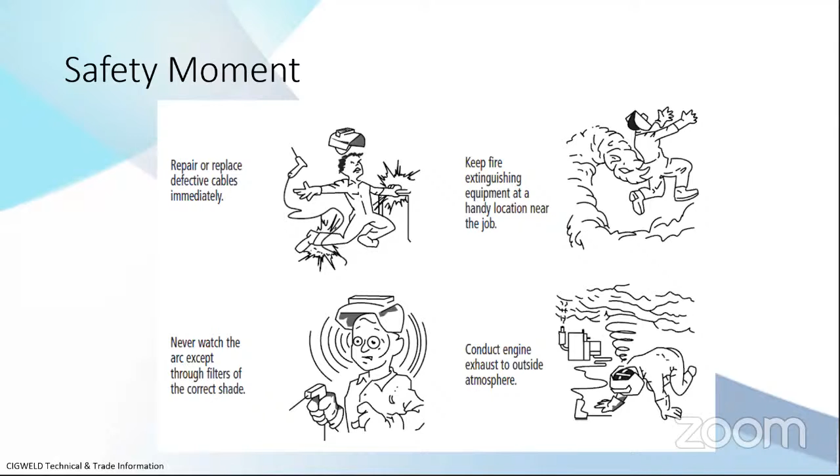Be aware of the ventilation from the fumes of the welding flux and welding gases. Also, if you're welding in a confined space, provide ventilation and have somebody to make sure that you are okay, and keep all the electrical connections safe. All the cables should be clear of the right of way of people, so they don't get stuck on the cable.

And when you are welding with explosive gas or anything that can be explosive, please take care of the distance, and also just beware of the environment during welding.

So after the safety moments, I will try to scope my presentation. I hope everything can be completed in the time allocated to me.

This presentation mainly relates to arc welding, and the materials are carbon steel, stainless steel, and nickel alloys. I will only speak about corrosion and some metallurgical defects during welding. Frankly speaking, I'm not a welding expert, so I will not discuss welding process, or any mechanical defects that may arise from welding. Also, other metals like aluminum, copper, and non-metallic materials like plastics or FRP, I will not discuss in this presentation. So the scope will be just arc welding, carbon steel, stainless steel, and nickel alloys, and corrosion problems in welding.

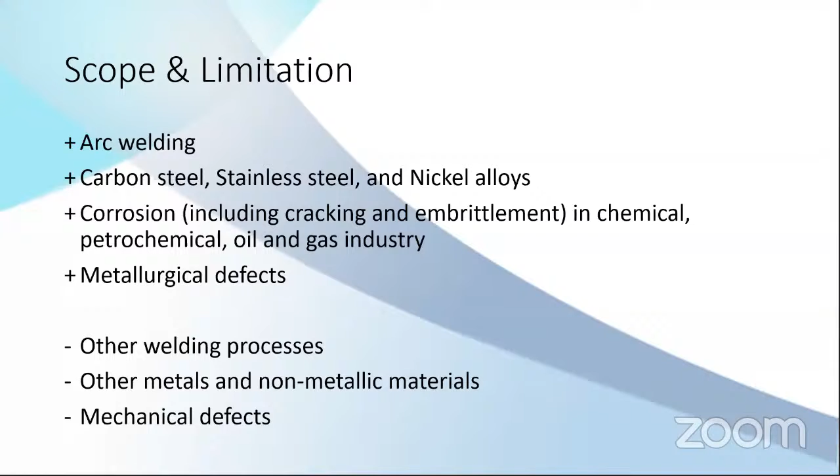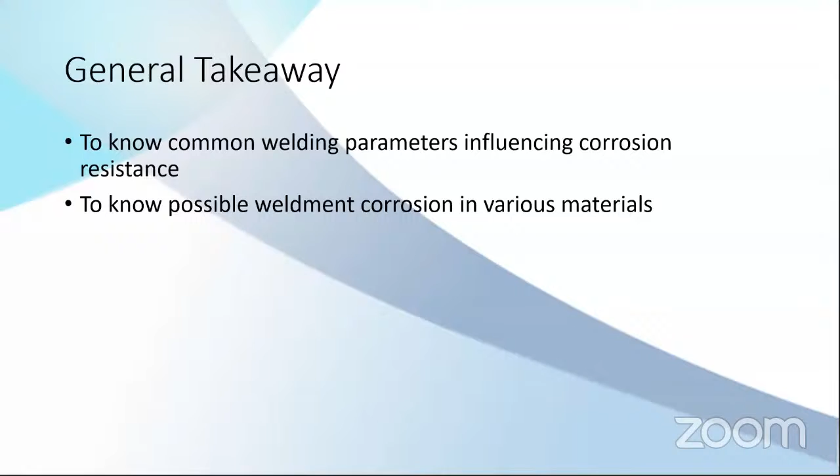This presentation is very basic. So if you are already an expert in welding, you might be bored by this, but this is for, like, a junior engineer, so they can take something from this presentation. First is for people to know the common welding parameters that can influence corrosion in materials. Also, what are the possible corrosion problems in the weldments of various materials, and to know the importance of corrosion qualification tests before welding. The last one is to know additional information that I hope can reduce the probability of weldment corrosion.

For this whole presentation, there will be a lot of abbreviations. I'm trying to shorten a lot of things just to make it more clean to the eyes. So if you find CS, it means carbon steel, SS means stainless steel, HAZ means heat affected zones, CRA means corrosion resistant alloys, which is a combination between stainless steel and nickel alloys, SCC means stress corrosion cracking, and PWHT is post-weld heat treatment.

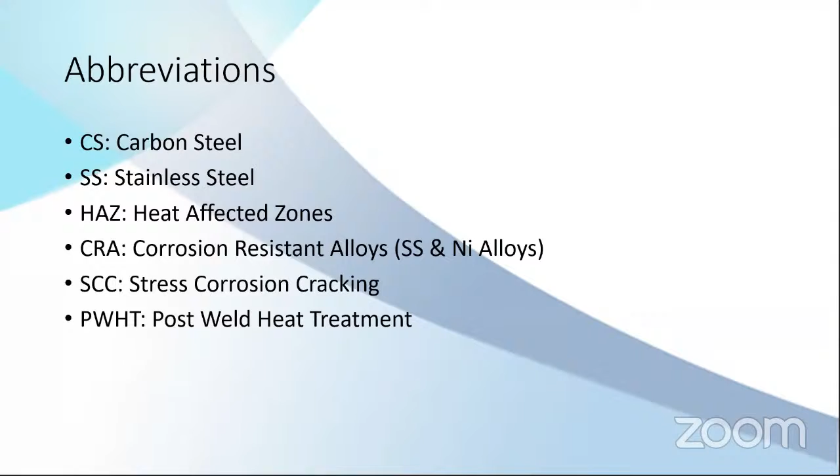Starting with corrosion, what is corrosion? This is my own words, so this is what I think about corrosion. It is reaction with environments causing the degradation of the materials and rendering it unusable over a certain period of time. So it might be fast, it might take some time, but it will degrade. And the problem is it cannot be seen after you weld the materials. It's not easily seen. You might see it after a few days or few months or few years, but it cannot be seen immediately.

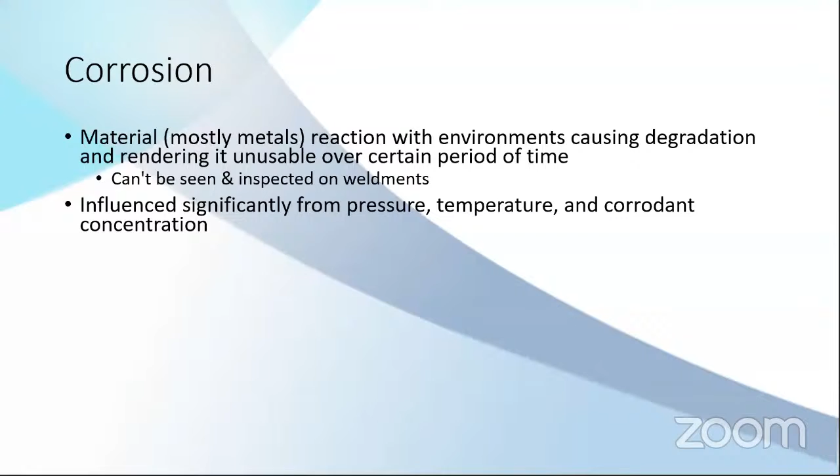Corrosion is something that is influenced significantly by the pressure, temperature, and the concentration of the corrosive substances.

Normally, the main mitigation, in general, there are 5 mitigations of corrosion. First is using proper material selection. Second is cathodic protection. Third is you coat the materials to avoid contact with the corrosive environment. Fourth is chemical treatment, where you change the environment. And the fifth is corrosion monitoring. You just monitor the corrosion, it's already happened, but you can monitor to avoid failure. So before failure, you already know that this is going to fail, and you can mitigate, change the materials, or repair the materials.

And the aim for the welding is to get not better corrosion resistance, but at least similar to the parent material.

This is what I think is why the weldments area is more susceptible than the parent material. In the parent material, for example, a pipe or a plate, it's produced in a factory environment. It's mass production, so the process of production is mechanized, automatic, and they make the material almost every day. They produce a pipe 1,000 tons probably every day, so it's a uniform process. The microstructure of the material can be easily controlled by heat treatment because the sizes are limited, so it's easily put in the furnace and heat treated to get properties according to what the customer wants. Chemical composition is uniform, it is already standardized, for example in ASTM, and there is no heat affected zones.

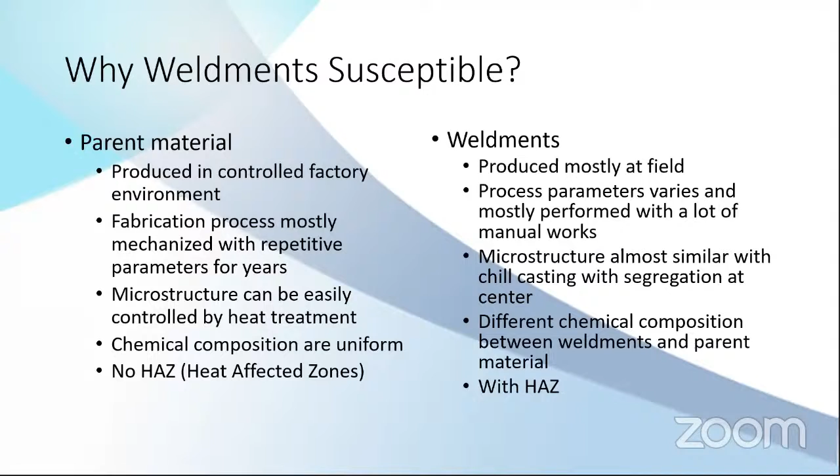Microstructure are not uniform, it's like a chill casting in combination with segregation of the chemical elements. And normally filler metals have different composition from the parent material, so you can get a very different chemical composition between the welding and the parent material. And the last one is in the welding, you have heat affected zones. I'll explain later about the heat affected zones.

What makes weld susceptible to corrosion is the segregation of the chemical elements, the probability of secondary phase precipitation, the possibility of heat affected zone, and the grains have recrystallization and probably grow, and also vaporized alloying elements. When the parent metals get heated, some part of the chemical elements get vaporized because of temperature that reaches thousands of Celsius.

Possible contamination of the weld pool from oil, grease, from oxygen. And when you weld, you put a very high temperature, and it can give you residual stress after the weld is cool. Also, rapid cooling may happen during welding, especially during arc strikes or in the area of unmixed zones.

And surface finish - after weld, you need to clean the surface again to avoid reduction of corrosion resistance. So you can find heat tint after the weld. You can have slag, and you can pickle the surface to get better corrosion resistance.

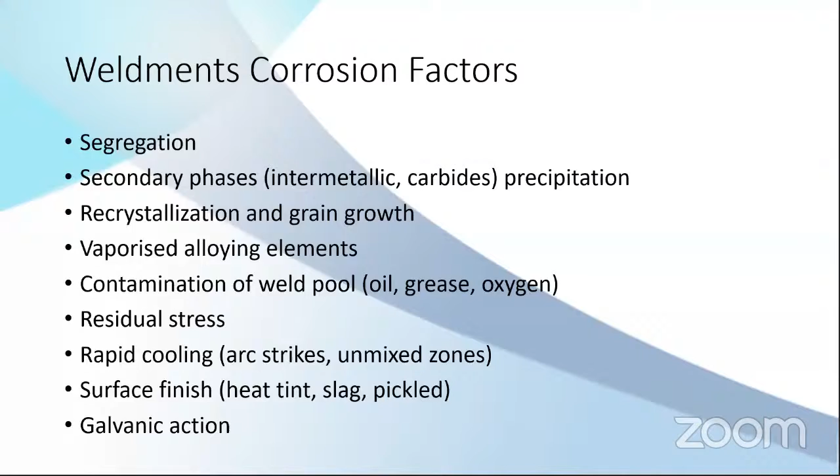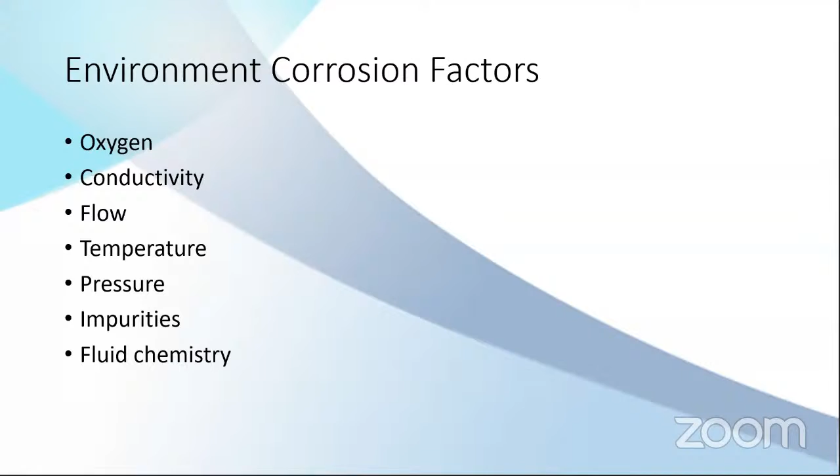The previous slide is from the welding, but this slide is from the environment that can cause the corrosion. If the fluid has oxygen, definitely you can get corrosion. If the fluid is highly conductive, also it makes it easier to get corrosion. High flow, high temperature, high pressure, presence of impurities, the total fluid chemistry - all this is variables that can affect the corrosion risk.

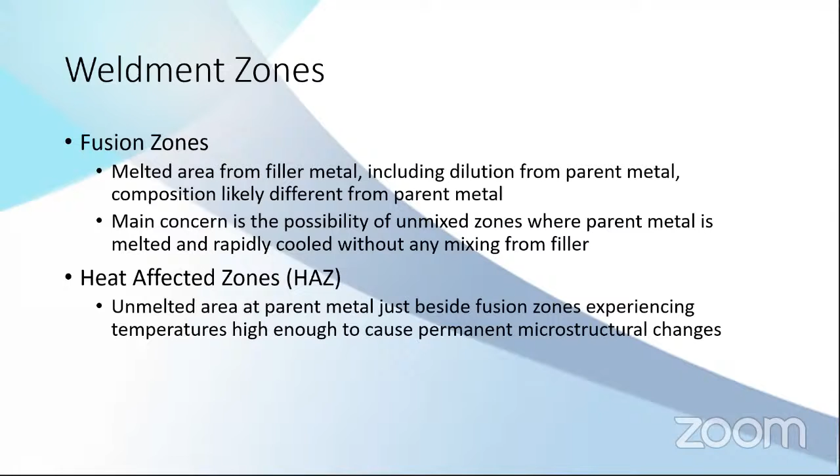It's like autogenous welding. And the second zone is heat affected zones. It is an area of the parent metal that is not melted, but it experiences high temperature, so the microstructure changes permanently.

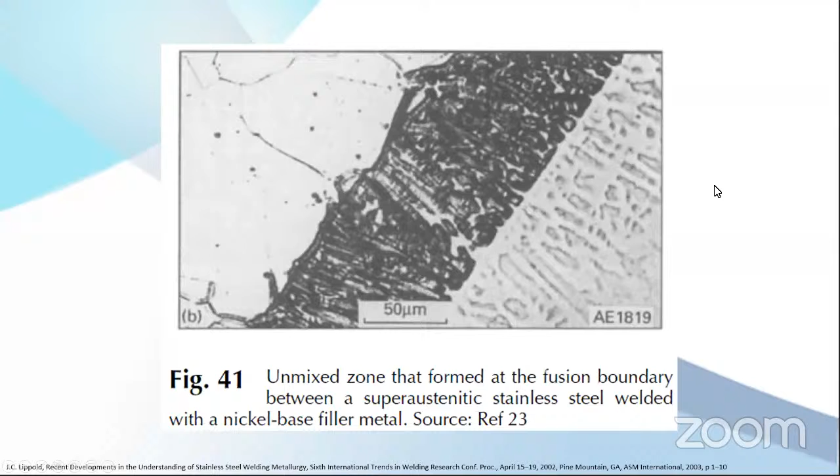And what are the common corrosion types that happen on the weldment area? I have compiled some of the corrosion types that I know. This may not be everything, but this is what I know mostly, and this is what I normally mitigate when I write the specification for corrosion prevention.

So there will be preferential weld corrosion, sensitization, knife line attack, secondary phase precipitation, liquid metal embrittlement. This is all I can consider metal loss corrosion, where the metal will be losing material over time. So this is predictable and it can be monitored.

The second one is SCC, or stress corrosion cracking. This is the worst of all, because normally it cannot be predicted when it will happen, because it's a crack. When the crack happens, then it's very easy to lose the pressure containing strength when you find cracks. And these cracks can be caused by many factors.

It can be from chloride, polythionic acid, sulfide, caustic, amine, and carbonate. All of this chemistry normally we can find in oil and gas, chemical, and petrochemical. So there might be other corrosive environments that I didn't mention here because it's not my specialty.

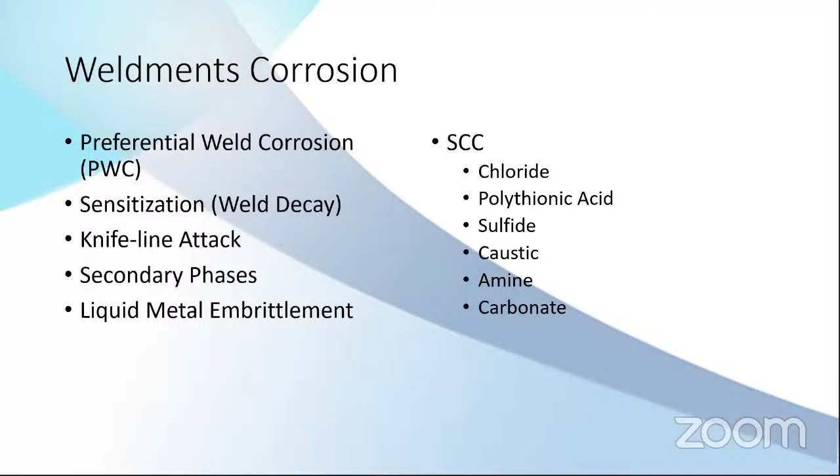So I will discuss one by one of these weldment corrosion types. First is PWC, preferential weld corrosion. Affected materials are carbon steel. The corrodant is the corrosive elements that can cause the corrosion: acidic water or low pH water, seawater, high CO2. So it's like a carbonic acid.

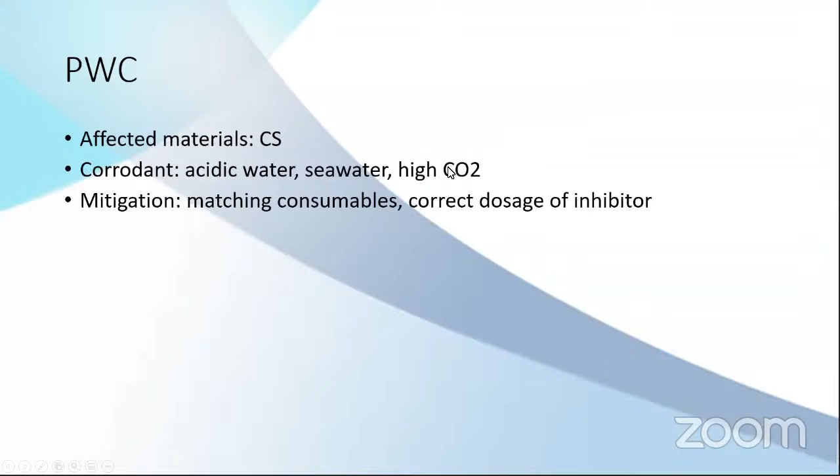This preferential weld corrosion is where the weldments are corroded faster than the parent material. To mitigate it, use matching consumables and correct dosage of inhibitor. The reason is that weldments have different chemical composition and microstructure than the parent metal. So when consumables used are not similar, not close to the parent material, it can be preferentially attacked.

It might have a lower corrosion resistance than the parent material, so it gets attacked even more because of the galvanic action.

And why is the mitigation correct dosage of inhibitor? Because this also happens when you have a system where corrosion inhibitor is used. Normally, when we use the corrosion inhibitor, we qualify how much inhibitor we need to add to the system to make it long lasting, make the corrosion rate low. But this qualification normally we do with the parent material or corrosion monitoring like a coupon or corrosion probe, and we didn't do it from the weldments.

And the problem is that the weldments are not fully protected by the corrosion inhibitor, so they can get preferential weld corrosion as well. So when you use corrosion inhibitor, normally the best practice is to increase the dosage a little bit to make sure that the weldments are protected.

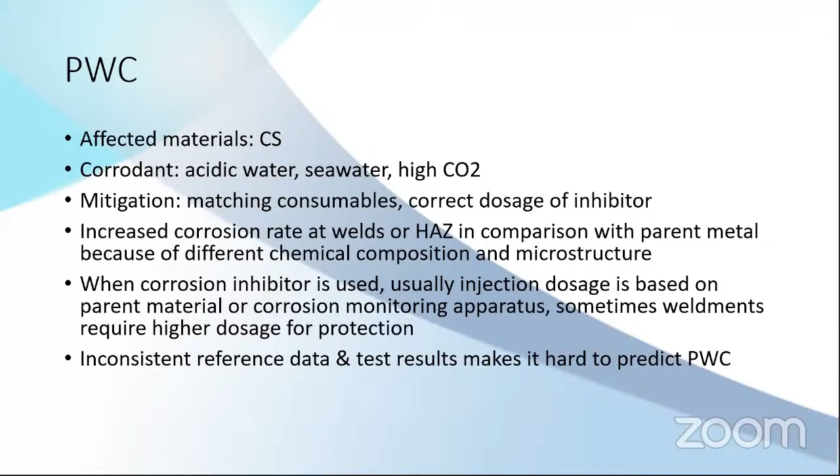So it's hard to predict if the PWC will happen or not. The best option is to use matching consumables always to mitigate this problem, so you don't have any chances of this PWC.

And this PWC happens mostly in very corrosive environments. If it's mildly corrosive, it normally doesn't happen, so you get the same corrosion resistance between the parent material and the weldments. But if it's in a very corrosive environment, then you can have it different. The weldments probably get attacked faster than the parent material.

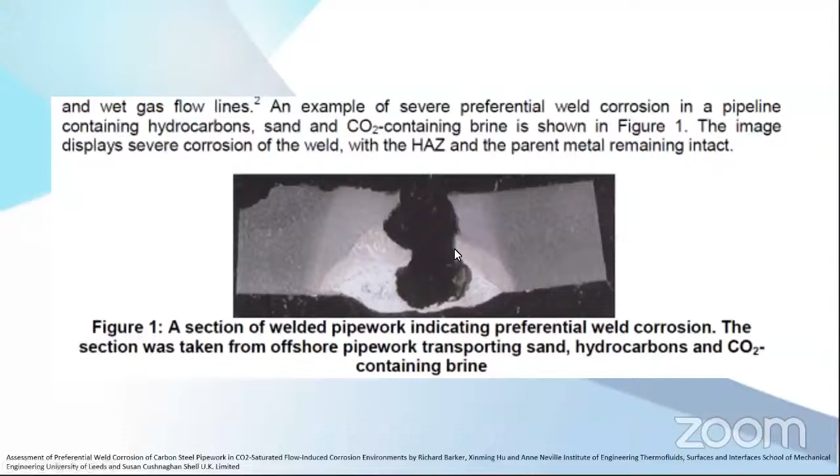And this is the testing that was done by TWI. They're testing what the effect is of using consumables with different chemical composition. You can see the weld is the black one, and the rest is white, which is the parent material, and beside this is the heat affected zone.

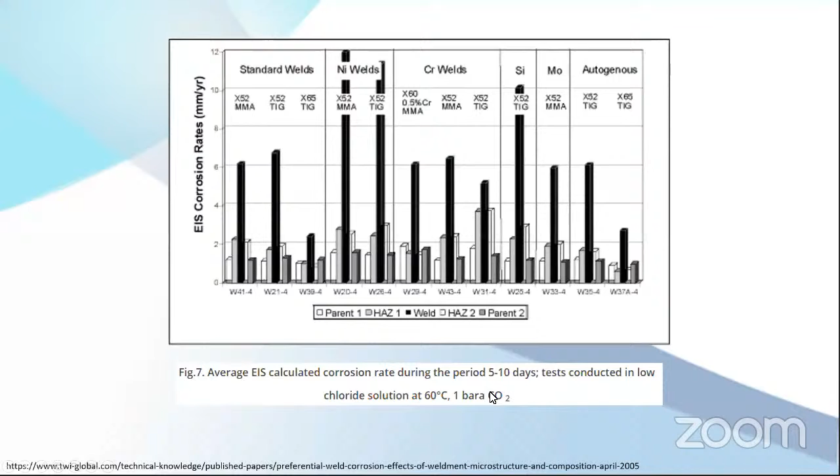As you can see, the result is inconsistent. Sometimes, even in the matching consumables, you can have higher corrosion in the welds, and sometimes you don't. In the nickel addition welds, 1% nickel, you get very high weldment corrosion. With silicon, you also have very high corrosion. But this is in a low chloride solution, 60 degrees and 1 bar CO2.

So previously it was PW corrosion for carbon steel. Now it's a sensitization problem. This is for stainless steel and nickel-based alloys. When the stainless steel or nickel-based alloy are sensitized, any corrosion can start on the material.

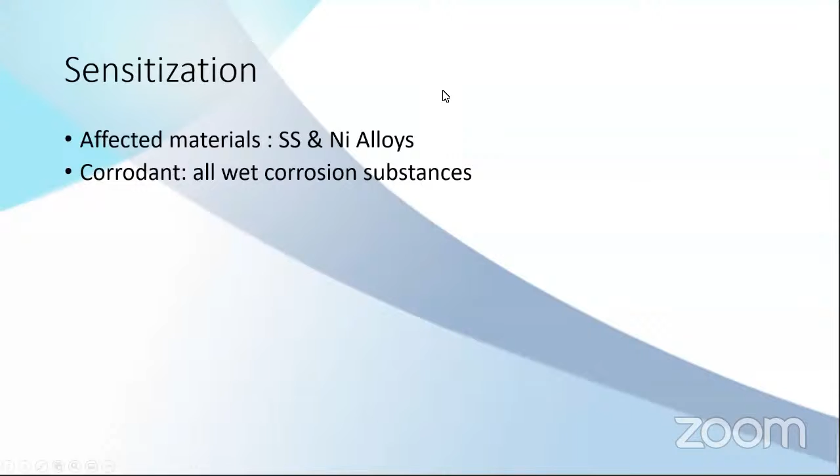So this sensitization is the reaction between carbon and chromium in the stainless steel or nickel-based alloys. One of the mitigation methods is to use lower carbon, or to add stabilization chemical elements, either niobium or titanium. These take carbon more easily than chromium, so when you add them, they react first with the carbon, and the chromium can stand by itself. It doesn't react with the carbon.

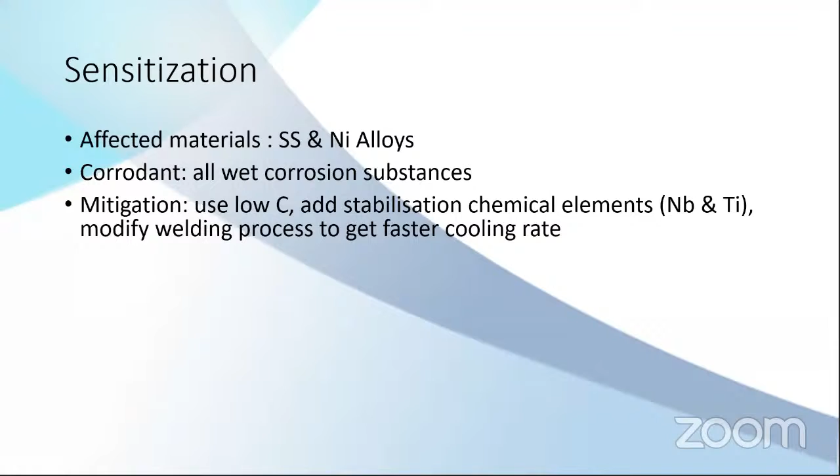Or if you don't have that choice, you have to modify the welding process to get a faster cooling rate, so there isn't enough time for chromium and carbon to react. This is the mechanism: the precipitation of chromium with carbon creates chromium carbides in the heat affected zone grain boundaries, and this happens at temperatures between 500 to 900 in general. It normally occurs during the cooling of the welding process.

What is the chemical composition? It's chromium 23 and carbon 6, meaning 6 carbon atoms take a lot of chromium atoms - it's 1 carbon to 4. So even a small amount of carbon in the material can take a lot of chromium from the metal. When the grain boundaries don't have enough chromium, you can have corrosion in that area.

For information, even if you use low carbon steel and addition of chemical elements, it doesn't make it immune, but it prolongs the precipitation time. So if you have equipment working at 500 or 600 Celsius for years - I'd say 5 to 10 years or more - then you may have this problem.

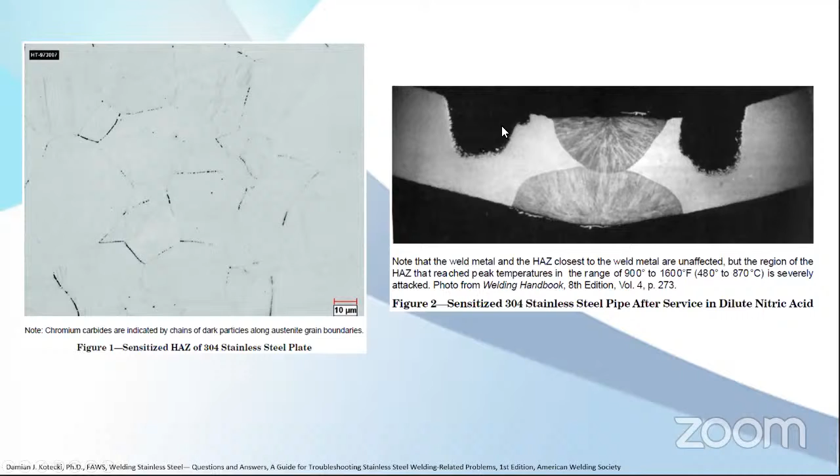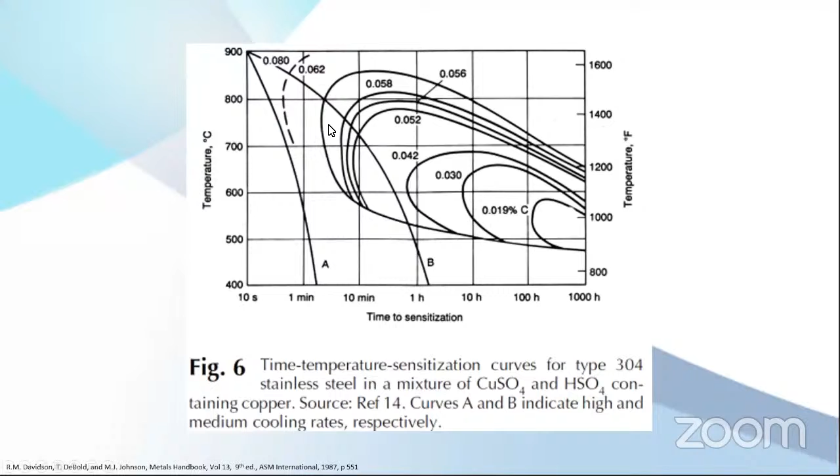So 0.03 is the L grade, for example 304L or 316L follows this line. I'd say it's pretty safe for any welding cooling not to reach this line. And it's not only stainless steel - nickel alloys too. Although it's very rare, nickel-based alloys can also have this sensitization. It's not the same curve, but the same concept: when you cool the metal and it contacts the nose, you get sensitization. So try to avoid long cooling times so it doesn't contact the nose.

Just as an example of the difference between stainless steels: for 304 you have maximum carbon 0.07, but for L grades you have maximum 0.03. Then there are stainless steels with stabilization elements - 321 has titanium, 347 has niobium. These can have higher carbon, 0.08, but the carbon is taken by the titanium or niobium. So there's no problem with chromium carbides - all the carbon is already reacted with titanium or niobium, so there's not enough carbon left to react with the chromium.

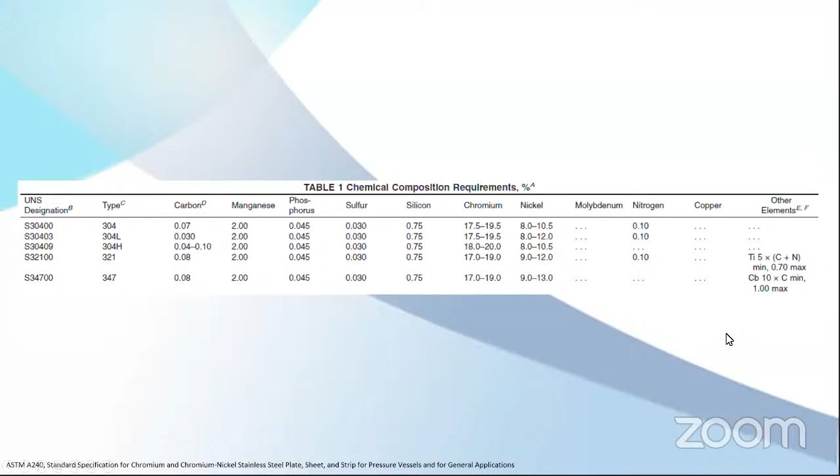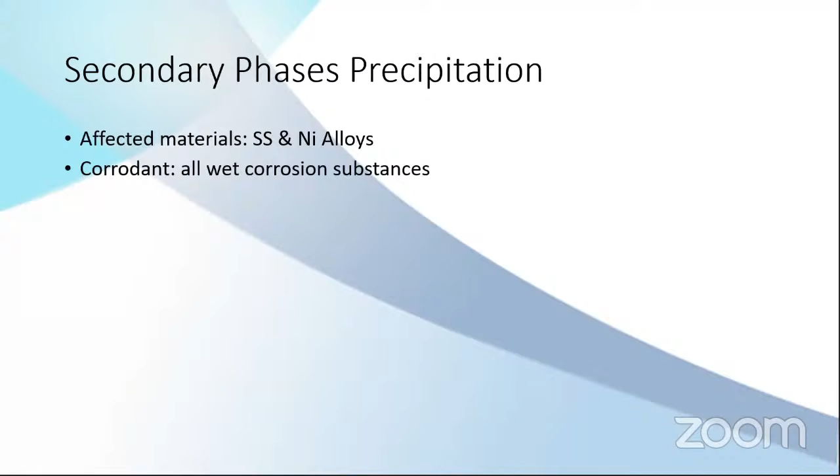And the third one is secondary phase precipitation. This is also mostly caused by weldments, affecting materials like stainless steel and nickel alloys. All corrosive products can happen when you have this secondary phase.

The mitigation is to minimize ferritic phase at high temperature. Ferritic phase is very susceptible, it's very easy to generate secondary phase.

The concept is similar. The secondary phase is what we normally call intermetallic phase, where the metals diffuse into each other and become intermetallic. The problem is that the elements that diffuse and react with each other are the ones that give corrosion resistance, for example chromium and molybdenum. When they react with each other, they can no longer protect the materials, so the area surrounding this secondary phase will have very fast corrosion.

There are many forms of secondary phase, this is just a generalization. It can be 475 embrittlement, it can be called sigma phase, it can be in the form of nitrides. The causes are accumulation of heating time and reaching the nose in the transformation curve, almost similar to sensitization.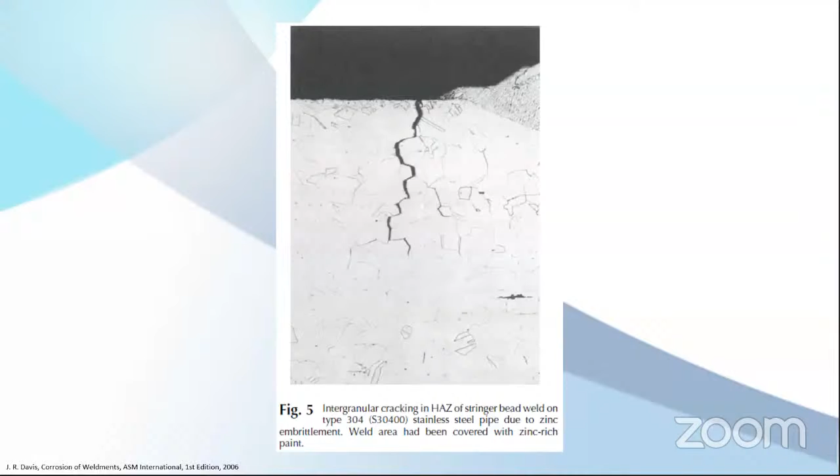Heat tinting also causes a lot of corrosion to stainless steel, we often see this in the field. The affected materials are oxide forming alloys, any materials that form oxide layers can have this heat tint problem, such as stainless steel, nickel alloys, and titanium alloys. When you have this heat tint, all the corrosive products can corrode the material. So what is this heat tint?

It's a layer caused by oxygen contamination. When you have oxygen and high temperature during welding, it reacts with the metal in the material and creates scales. It is not an oxide layer, it's not protective, it's scale, it's brittle and porous, and it takes a lot of chromium.

So when you have this heat tint on the stainless steel surface, the area below the heat tint has a very low chromium content, and it's very easy to corrode the area at the heat tint.

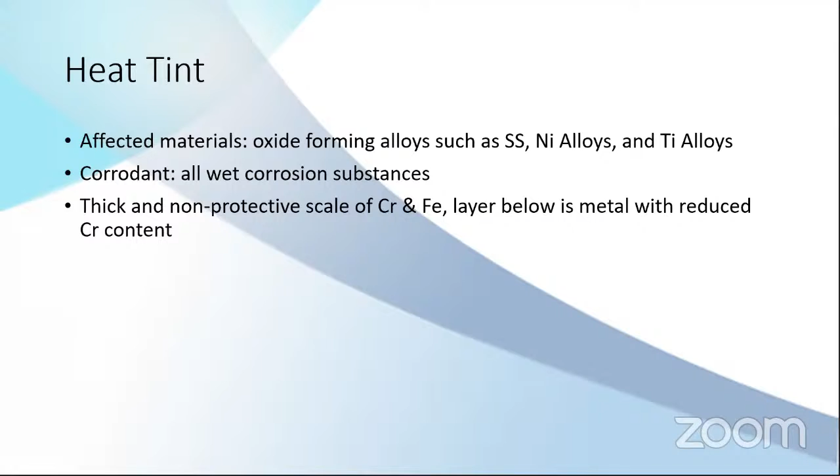So normally, if it's a very corrosive condition during the weld, we ask for the welding design to have the trailing gas to make sure that there is low probability of oxygen contamination.

And the problem also, why this happens a lot, is because it's a color-based decision if this is acceptable or not. So it's very subjective from the inspector's point of view. The inspector can accept or reject the heat tint. So likely they're asking for repair, at least for the heat tint, so...

it doesn't cause any problem. Or during the weld, they ask for using oxygen measurement tools to ensure that there is no contamination. And as the equipment user, we prefer that heat tint not exist, but if it exists, there is some acceptable heat tint color that we can accept.

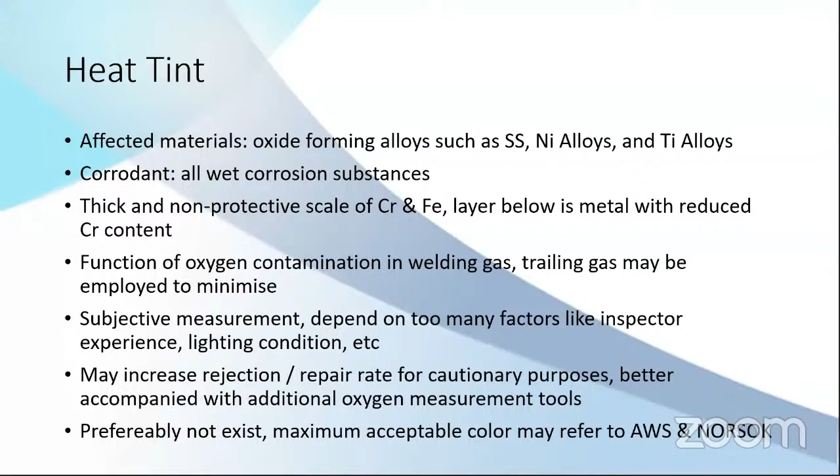You can see, I remind all of you once more, if you need to find the references, I put it on the bottom left of the pictures. All the pictures have these references, and this is for AWS. You can see what is the effect of oxygen on the heat tint. The more oxygen contamination, the darker the color you have.

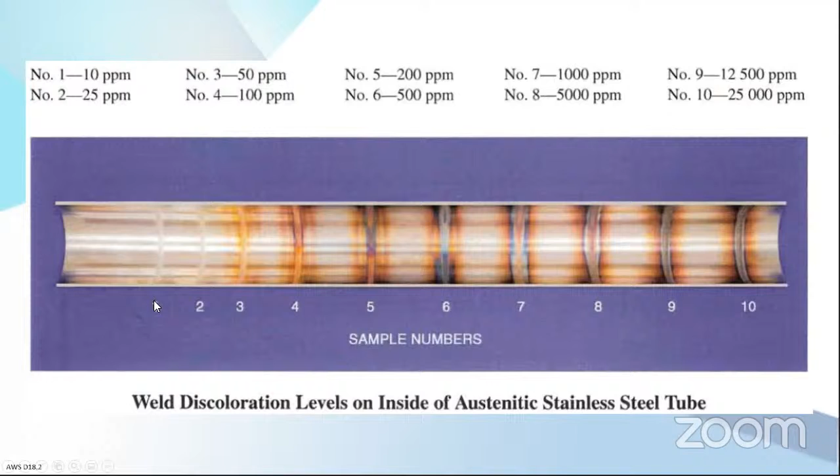So this is also subjective. Which number is accepted? Is 3 accepted? Is 4 accepted? That depends on the inspectors. Number 1 and 2 is what we really want. This is even more pronounced when you have application in food or pharmaceutical industry. They almost always want one, no heat tint.

And this is what happens to corrosion resistance when you have oxygen contamination. This is an example of duplex and high alloy austenitic stainless steel. This is 2205 duplex. This is 904L. So when it's the parent material, you have a very high critical pitting temperature. Critical pitting temperature is the temperature when pitting happens - the higher the temperature, the better the material.

So this is the parent material - they have a very high temperature before the metal experiences pitting. And this is the welding gas, argon with 5 ppm oxygen, so there is reduction but not a lot. But if you see here, if it reaches 50 ppm oxygen, it's almost half of the original corrosion resistance.

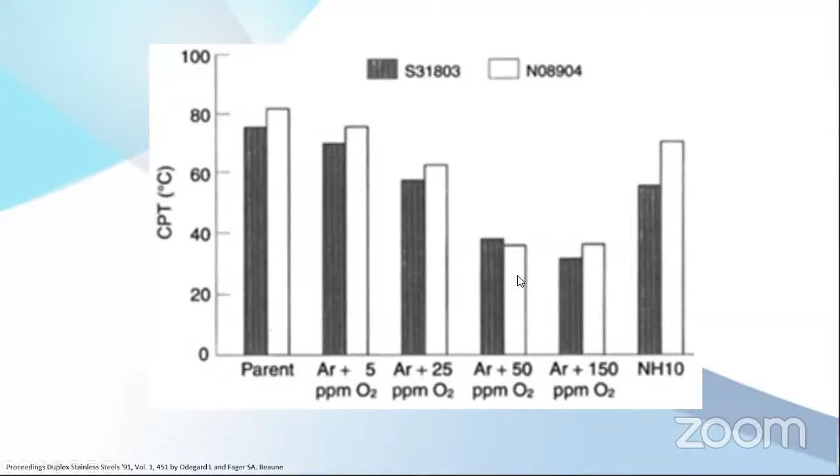So in the application during service, it can get corroded very easily, very fast. Let's see, this is the 50 ppm O2, and 50 ppm is number 3. Even this is not accepted - it can cause a significant corrosion problem in the weldment area.

And this is knife line attack. It is similar to sensitization, but the affected materials are stabilized stainless steel with niobium and titanium. So I repeat again, they are using titanium and niobium to take the carbons so that they don't react with the chromium. And it's the same when you have knife attack - knife line attack. It seems like sensitization, so all the corrosive products can corrode the material.

The mitigation is to heat treat again at the heat-affected zone at 900 Celsius. So this is very similar to sensitization.

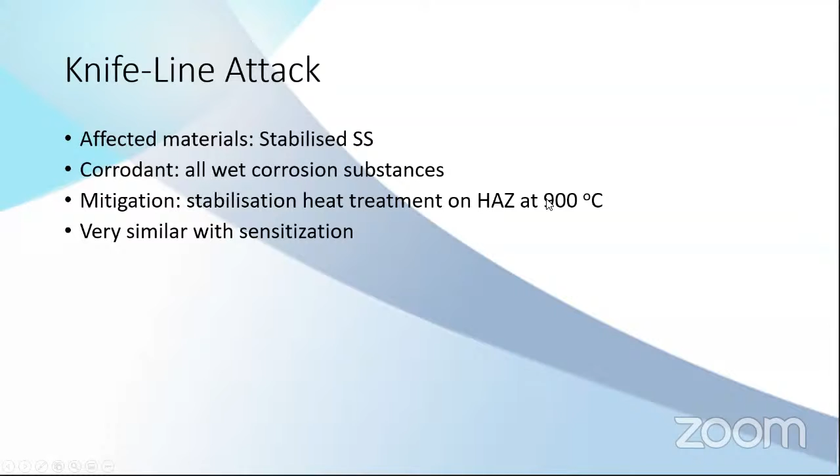And the problem with this is when the welding has quite high heat input, the niobium and titanium carbides dissolve again, so the carbides become free again - the carbon atoms become free again. And then it's cooled immediately because it's located in the HAZ. And because of the fast cooling, the niobium and titanium don't combine with the carbons.

So the problem is that the chromium carbides form at a lower temperature than 900. So when it's exposed to that temperature below 900, the niobium and titanium still cannot take the carbon because it's not the temperature where they can take the carbon. Then chromium takes the carbons and it gets sensitized.

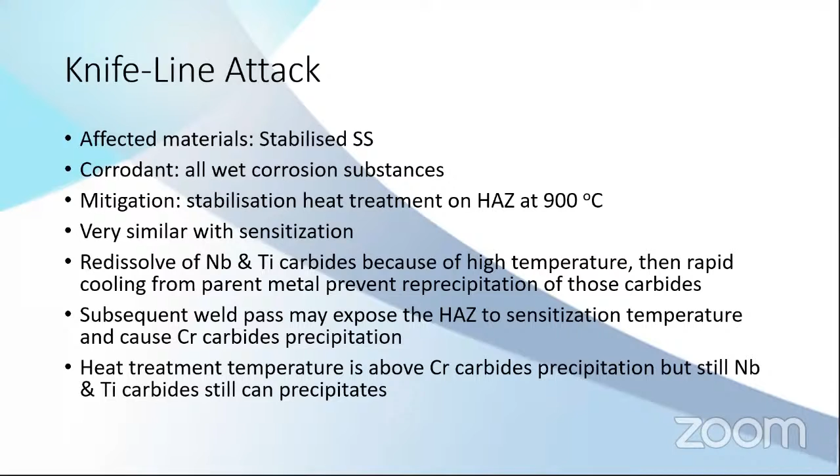So it's the same thing as sensitization, but it just happens on the stabilized stainless steel. This is now we are entering stress corrosion cracking.

Just to remind again, this is very important because it happens rapidly, very often unpredictable, and almost all weldments are probably susceptible because they already have stress inside the weldment, the residual stress. So most of the mitigation will be related to the reduction of the residual stress or post-weld heat treatment.

This polythionic acid stress corrosion cracking is caused by sensitized stainless steel and nickel alloys. It's still related to the previous damage mechanism, but the corrodent - if it's just sensitization, you get faster corrosion, but not cracking. But if you have the corrodent in the form of sulfides, moisture, and oxygen, then it may cause cracking.

So the mitigation is to avoid contact with the atmosphere, so you don't get moisture and oxygen, or you use heat treated stabilized stainless steel - the one with niobium and titanium addition.

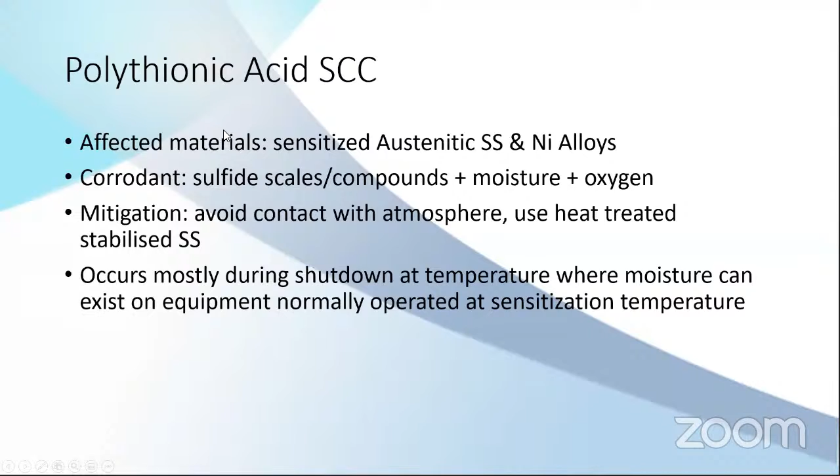When it's shut down, it goes to ambient temperature. When it's ambient, there will be moisture from the environment, there will be exposure to the atmosphere. Then in the end you have these three combinations: sulfide scales, moisture, and oxygen, and that causes cracking. This is an example of polythionic stress corrosion cracking. It always happens around welds because of the stress.

It's a branching crack, and only happens where the equipment operated at sensitization temperature with sulfur compound. If you don't have the sulfur compound, then you will not have this polythionic acid stress corrosion cracking.

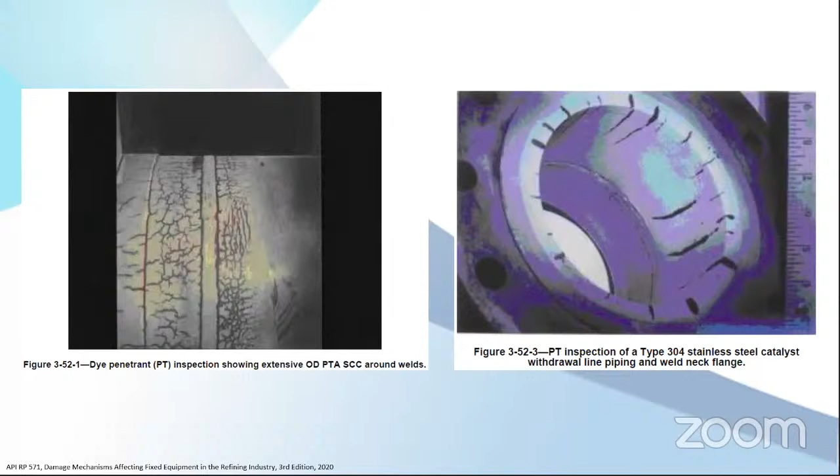Another form of cracking is amine stress corrosion cracking, but this only happens to carbon steel. The corrodent is contaminated amine, most of the time contaminated by carbon dioxide or H2S. This is also in oil and gas - used for gas treating. They treat the gas to remove CO2 and H2S so they can sell the gas as LPG or LNG.

The mitigation is simple - it's just post-weld heat treatment. Normally we refer to NACE SP0472. In this standard, there is already an explanation about how high the temperature should be for the post-weld heat treatment.

Just to make sure - if it's fresh amine, it's not susceptible, it's resistant from amine stress corrosion cracking, only in contaminated amine is it susceptible. Actually it depends on the type of amine, depends on temperature, depends on the stress level. But from the safe side, normally when you have carbon steel in the amine environment, you just post-weld heat treat it anyway for the safe side.

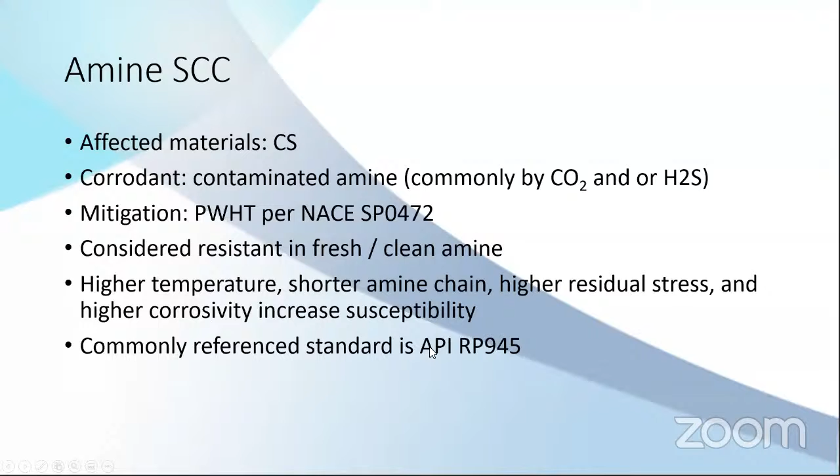Because normally this amine system is an important system in the refinery, so if it's getting shut down because of corrosion, then you have a lot of problems in the whole refinery. So it's better to post-weld heat treat the welds when you have amine service. Or you can refer to the most commonly referenced standard, API RP945. But in this API standard, one of the clauses for PWHT refers back to NACE SP0472.

This is the example of amine stress corrosion cracking. The first one, when it's not post-weld heat treated, this is the area where you have very high stress in the HAZ, it's cracked. And the second one is from the arc strike - this is also very high stress in this area, so the crack initiates from this area.

This leak occurred after 30 years of service. So as I said before, stress corrosion cracking you cannot predict. You can have it tomorrow, or maybe you are safe from cracking for many years. That's the problem - you cannot know. So it's always recommended to be on the safe side when you have this stress corrosion cracking potential.

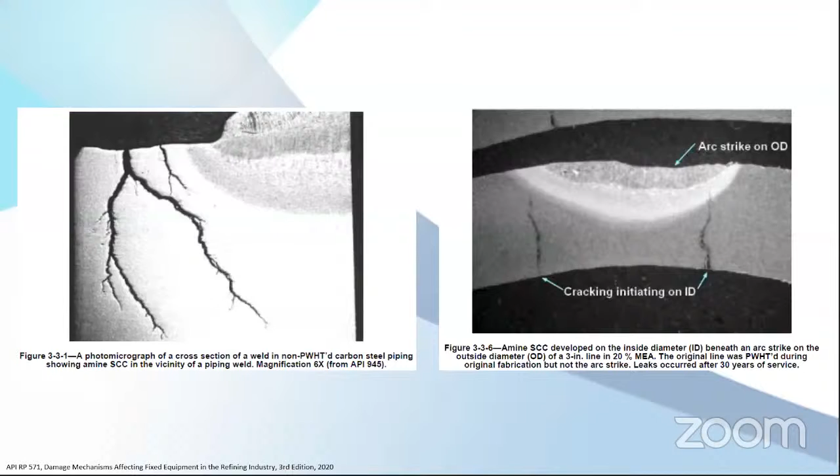Another one is carbonate stress corrosion cracking in carbon steel. The corrosion occurs when you have carbonate, CO3. The same mitigation - you can refer to the NACE standard. This NACE standard consists of many mitigations for environmental cracking, not only amine, not only H2S, but many cracking mechanisms for carbon steel. You can read the standard and get some information about it. This carbonate cracking also normally happens at a relatively high pH.

When there is ammonia or H2S, it will increase the susceptibility to carbonate cracking. But again, for the safe side, it's always recommended to PWHT the weldment area.

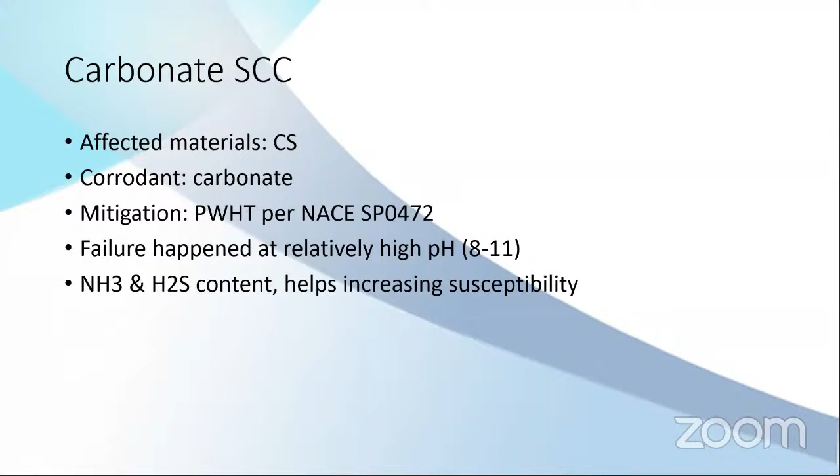This also happens quite a lot in non-PWHT weldments, mostly in refineries. This is one of the examples - you can see the cracks are longitudinal with the weldments.

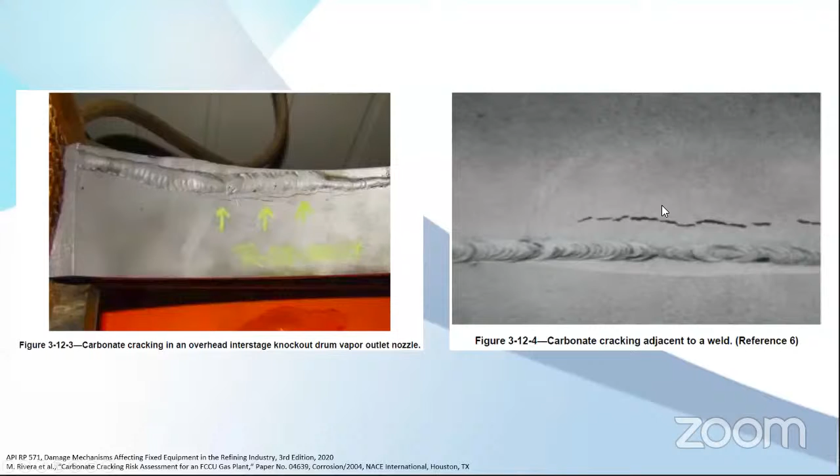Caustic stress corrosion cracking affects carbon steel and stainless steel - they are both susceptible to these cracks. The corrosion is caustic, NaOH or KOH, natrium hydroxide or kalium hydroxide. This also happens mostly in caustic plants or refineries because they both use caustic quite a lot.

There are two types of mitigation: post-weld heat treatment. But sometimes post-weld heat treatment is not enough, depending on the caustic concentration and temperature. The alternative is upgrading to nickel alloys, which are more resistant. There is a maximum temperature limit before the need to upgrade material to nickel alloys, despite PWHT. PWHT just extends the operational range, but not for all ranges of concentration and temperature.

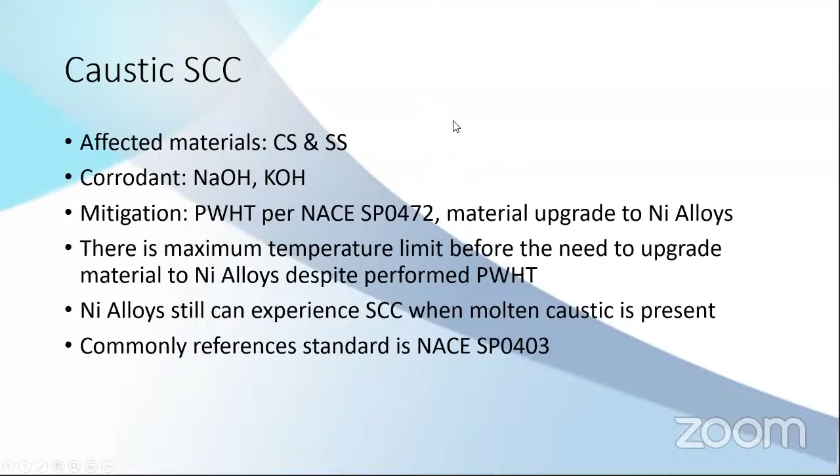But even if you upgrade to nickel alloys, you need to make sure there is no molten caustic present, because they can also experience stress corrosion cracking when molten caustic is there. You can see NACE SP0403 to read about this caustic stress corrosion cracking - there's a list of other mitigation processes over there. But what I said is just for the weldments.

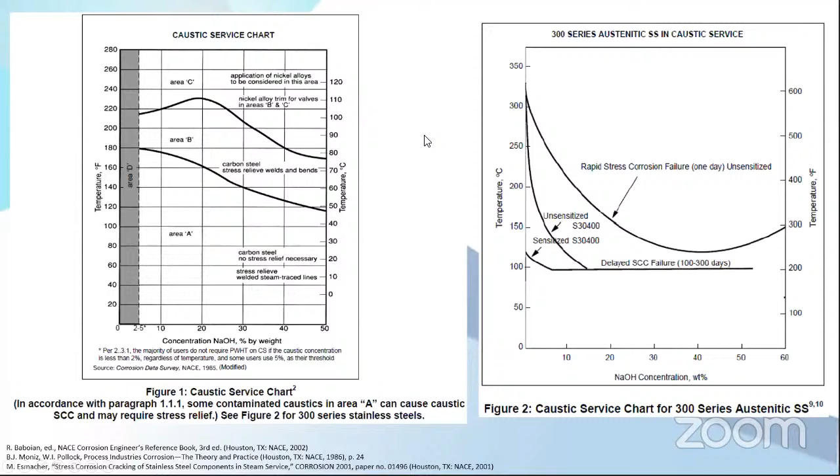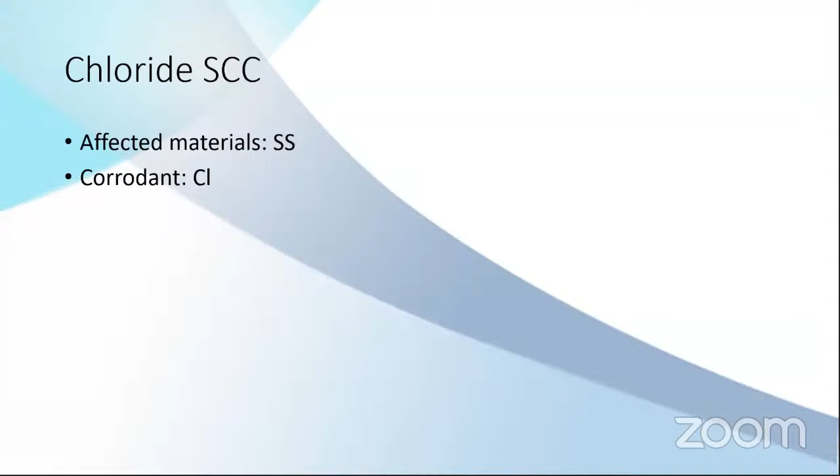Chloride stress corrosion cracking is next. It affects only stainless steel - carbon steel is not affected, nickel alloys are not affected. The corrodant is chlorides - when you have chlorides, you can have stress corrosion cracking in stainless steel.

The mitigation methods are material upgrade and limiting the temperature. Increasing nickel content or ferrite content increases the resistance to chloride. That's why nickel alloys are normally considered very resistant to chloride stress corrosion cracking. Duplex material, with high ferrite content, or ferritic stainless steel, is also considered very resistant to chloride stress corrosion cracking. When I say resistant, I mean highly resistant, but not immune.

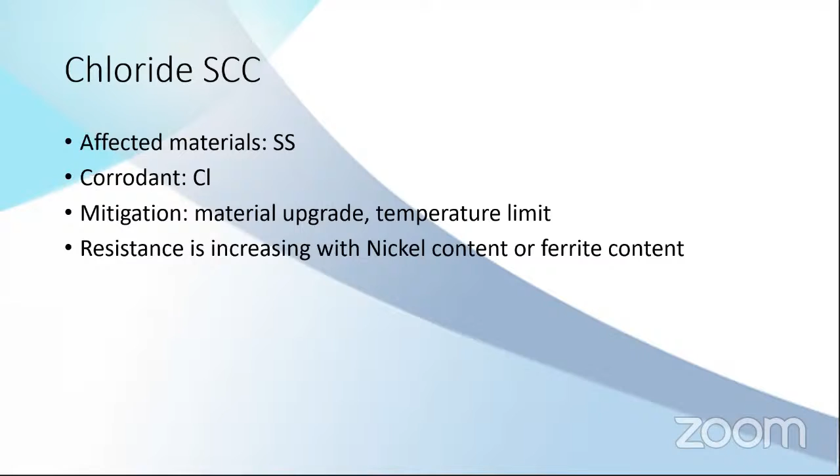In very high temperature or very high chloride content, some of this material can still crack, but you need very, very high parameter variables for that. Normally you don't find it in actual application.

So these are the general guidelines of application. If you have 304, 316 series stainless steel, the maximum limit is 60 Celsius. When you're using super duplex or duplex, you can have allowance up to 100 Celsius. Super duplex can have 110 Celsius. But this is just general guidelines - for a specific application, you need to consult with a corrosion engineer to check if this material still can be used or not. This is just a general rule of thumb.

You can see here this example of stress corrosion cracking in 316L - it almost always happens not in the weldment area, but in the HAZ area. Because normally in the weldments, the stainless steel has some residual ferrite, delta ferrite, so sometimes the weldment area is more resistant to cracking than the HAZ area. This time it's on the stress concentration area, on the toe - there's very high stress over here, so it can start cracking.

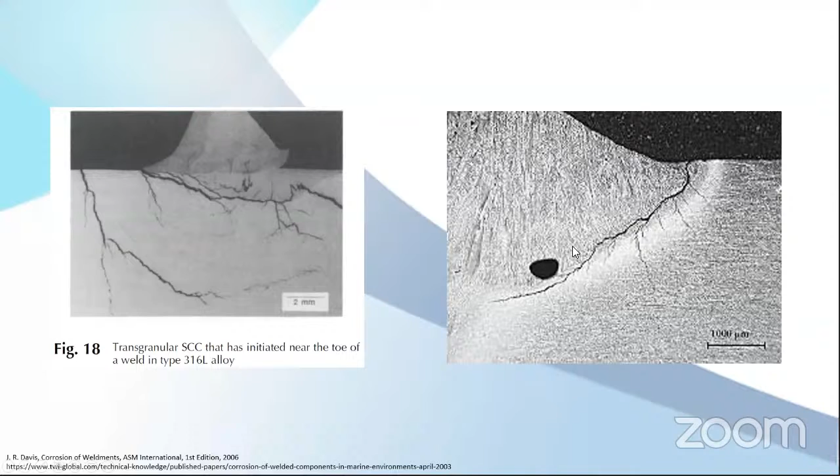I think this is the last one: sulfide stress corrosion cracking. This happens a lot in the oil and gas industry, where you have H2S. All materials are susceptible and can crack.

Carbon steel, stainless steel, nickel alloys, they can all crack. The corrosion agent is H2S. The mitigation is to limit the strength, and limiting the hardness is almost the same as limiting the strength. For all materials, when the hardness level does not exceed certain numbers, it can be considered resistant to sulfide stress corrosion cracking. For carbon steel, there are many mitigations other than hardness limitation, like post-weld heat treatment, temper bead welding, cooling rate control, and restriction of carbon equivalent.

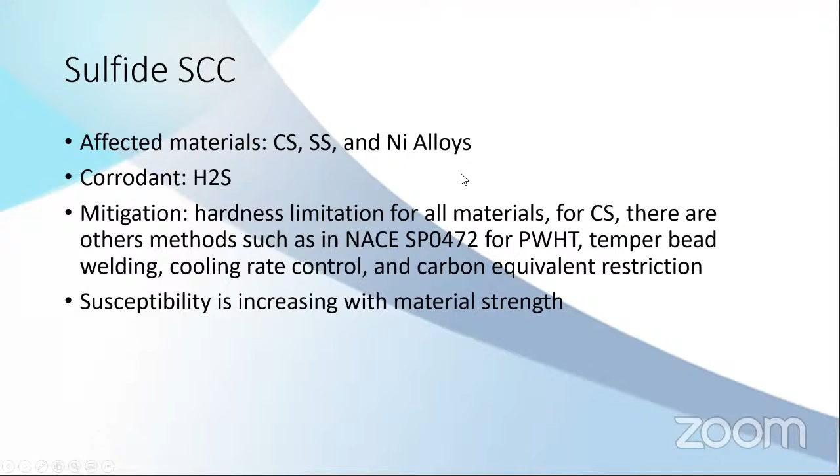So this is the general mechanism: the higher the strength, the more susceptible it is. But why is hardness used? Because it's the easiest method to measure material strength, since strength and hardness are linear. So when hardness is used, it's somehow equal to strength. Normally the limits are 22 on the Rockwell scale or 248 on the Vickers scale. That's the rule of thumb.

Cold forming of the materials, for example bending, is not recommended and shall be avoided. Do not cold form materials when you have H2S exposure, because some cold formed materials can have very high internal stress, but it doesn't reflect on the hardness. So the hardness value can still be below the guidelines, but because of the very high stress inside, it can still crack. It's hard to measure the cold forming effect on crack resistance, so it's almost always avoided for cold forming in H2S.

This is the most common reference standard. NACE MR0175 is for upstream and MR0103 is for refineries.

This example of sulfide stress cracking, you can see it starts on the very hard welded surface. It's reaching high hardness by Brinell, so it's very hard on the surface, so it starts to crack even when the hardness is already low elsewhere. But once the crack starts, it just propagates, it doesn't matter how much hardness is left in the material.

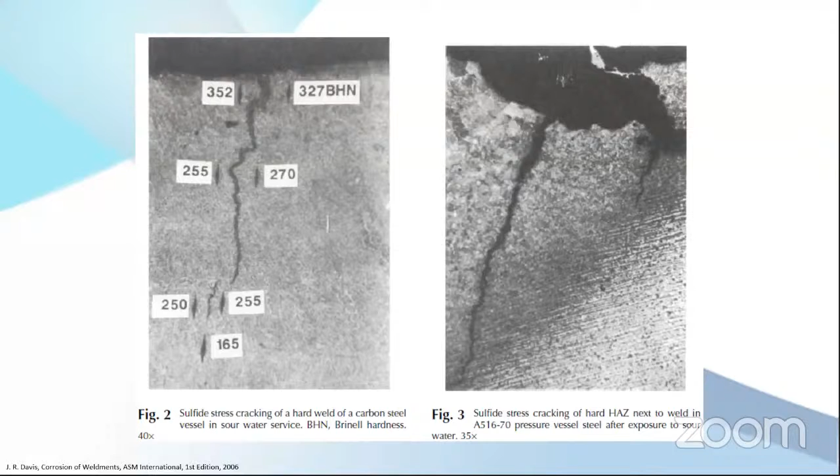This is the same, it's for the pressure vessel, also happening in the weldment area. Okay, that's all the common corrosion problems related to welding.

But there is also treatment for how to improve corrosion resistance. This is especially important for corrosion resistant alloys like stainless steel or nickel alloys.

Welding gas selection matters - for some alloys with nitrogen content in the metal, nitrogen is very volatile, so when you weld, the nitrogen can escape to the atmosphere. Sometimes you need to add nitrogen gas to the shielding or backing gas to avoid nitrogen loss. When you have nitrogen loss, for example in duplex stainless steel which is highly alloyed with nitrogen, it reduces the corrosion resistance a lot.

Also, if possible, it's recommended to always pickle the surface because it removes all the contaminants and renews the oxide layer on the corrosion resistant material. This is an example of welding gas selection and surface treatment applied to duplex material.

As you can see, this is the CPT, same as before, the critical pitting temperature - higher is better. This is as-welded with argon, and formier with argon and nitrogen. So when you weld with nitrogen, it has better corrosion resistance.

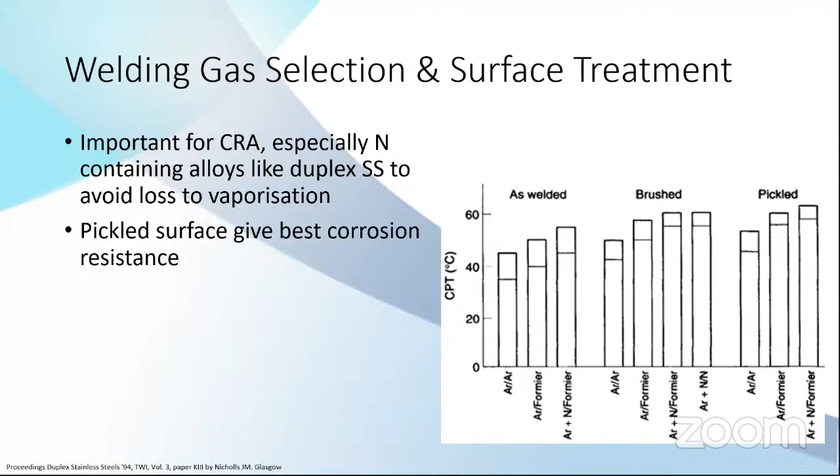Now about post-weld heat treatment - this is commonly done to avoid stress corrosion cracking because it reduces the residual stress level in the weldments. This is mostly applied only for carbon steel. When you apply it to stainless steel, it will cause another problem. Post-weld heat treatment is around 600 up to 650 Celsius, which is in the sensitization temperature range, so normally we avoid it for stainless steel because it makes it susceptible to other corrosion problems.

The temperature normally depends on the standard, you need to refer depending on the service - for example, amine service probably has a different heat treatment temperature than carbonate service. So you can refer to these standards or other standards.

Sometimes you cannot avoid it, but it's very rare that you cannot avoid to post-weld the corrosion resistant alloys. Maybe stainless steel you need to post-weld, probably because of the code requirement or because of the thickness.

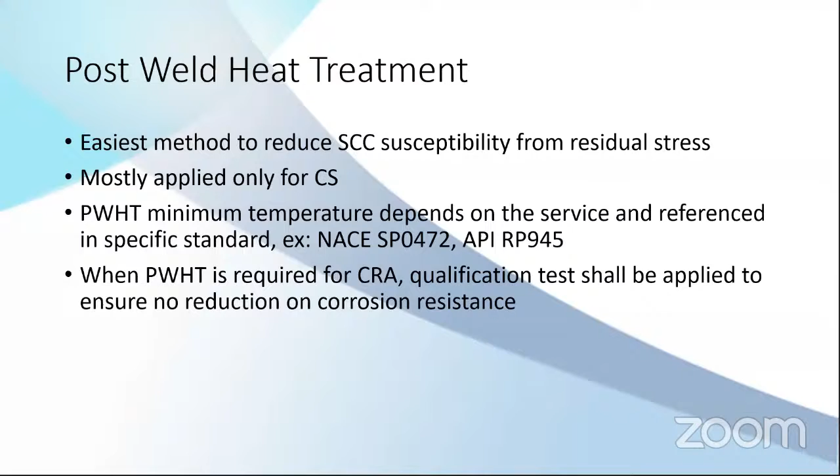Then what you can do is to qualify the welding parameters during the PQR. In the PQR you need to do the qualification test. The samples need to be corrosion tested to ensure that the application of post-weld treatment does not affect the corrosion resistance of the materials. If you don't do this, then it's possible during service the stainless steel will get corrosion because of sensitization. And that's why corrosion qualification test is very important during the PQR.

The type of test depends on the material and on the environment, depends on what is the corrosive substance. You need to know the material type and the environment that it will be exposed to.

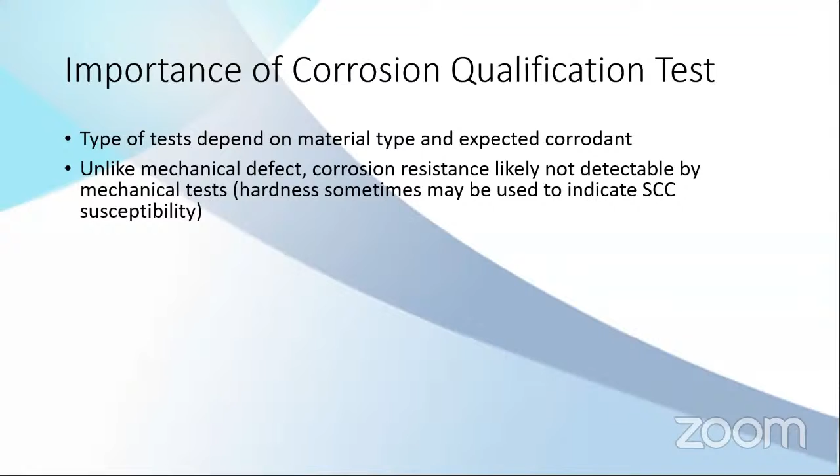And why is this important? Because not like mechanical defects, not like strength, normally the PQR is related only to the mechanical aspect of weldments, but they don't really see the corrosion aspect of the weldments. And it's hard to detect if the material is susceptible to certain corrosion or not. Although sometimes hardness can be seen - if it's very hard, then there's a high possibility it can impact the stress corrosion cracking susceptibility. But for corrosion because of the media, the general corrosion type or localized corrosion type like pitting corrosion, it's impossible to detect from mechanical testing. So you need to add corrosion testing during the PQR.

Why this is important also because you cannot see the corrosion happen right after welding. You need a certain period of time to realize that this weld has a corrosion problem, and this is very problematic with important equipment, because normally if you make something from stainless steel, let's say, you reduce the inspection period because you are quite sure that this equipment will last a lot longer than when equipment is made from carbon steel. This is the main problem. So many times it fails before you inspect the equipment because you didn't test the corrosion resistance during the PQR.

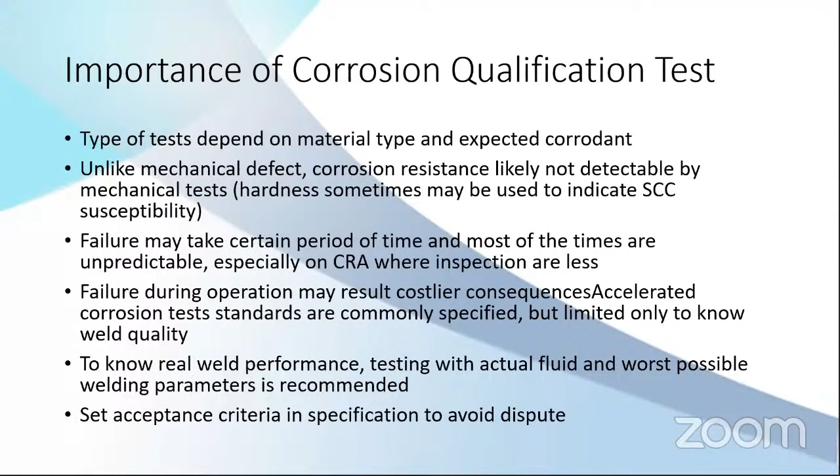But again, these tests are just to measure that the weld quality is good, but it doesn't represent actual fluid condition. So if you pass one of these tests, it doesn't mean that it will perform in the actual condition. Passing this test means that the result of the weldments are good enough.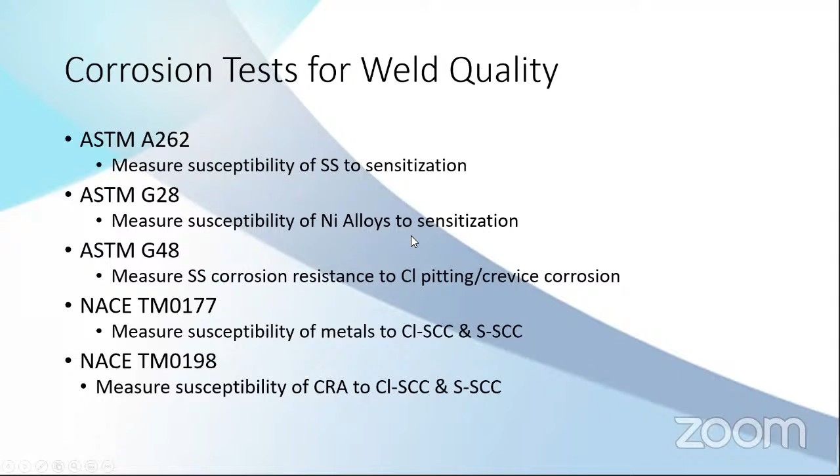And this is, we are almost at the end of the presentation. We have still a lot of time.

This common weld practice - this is what I normally check in the welding specification. So it's better to select the correct parent and filler material selection.

So it is more important for the first one, the preferential wet corrosion. It needs to minimize the galvanic effect, so the weldment does not experience faster corrosion than the parent material.

And fully clean all the joints, especially for corrosion resistant material. If you have moisture left or residual oil on the joint, then it will impact the corrosion resistance a lot.

And if possible, the design should have a flat beads and low profile, to avoid crevice and to avoid stress concentration, especially when it's related to stress corrosion cracking.

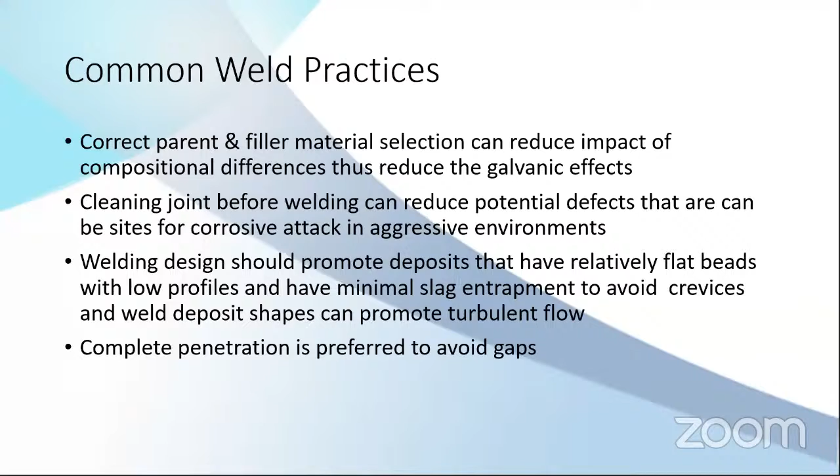And complete penetration is preferred for the corrosion resistant material, because if there is a space in between, that area can be the start of the corrosion.

And this is for the surface treatment. Maximum corrosion resistance can be achieved from a smooth surface, no heat tints, no foreign particles, no irregularities, and pickled surface.

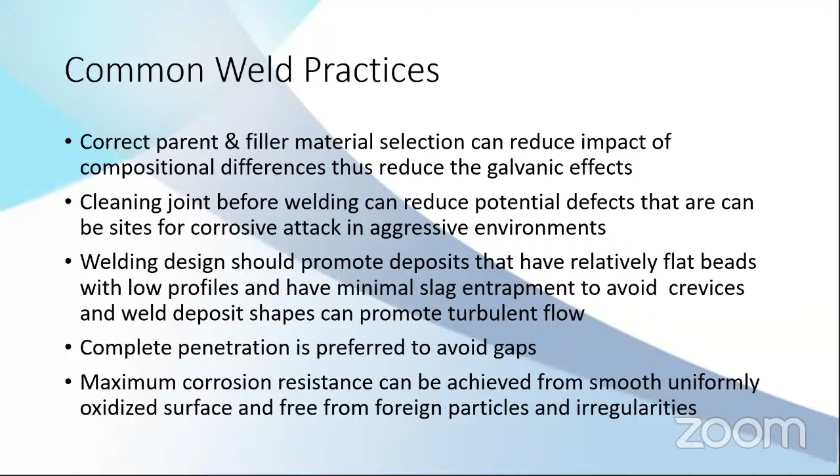And for corrosion resistant material, try to avoid contamination, try to avoid contact with carbon steel. Sometimes you put the stainless steel pipe on a carbon steel table, then it's bad because it contaminates the stainless steel. Or you use the same hammer for slag removal - that hammer can contaminate the stainless steel.

And if possible, weld with filler, because if it's autogenous, it may cause problems due to unwanted phase precipitation, or increase susceptibility to cracking and corrosion. If autogenous weld cannot be avoided, proper post-welding treatment must be completed.

The parent metal chemical composition and heat treatment shall be specified before creating the welding specification, because some heat sensitive alloys have chemical composition very related to the heat affected zone. If you have very bad chemical composition, you can result in very bad heat affected zones, because welding consumables cannot help heat affected zones - they only help the weld metal, the fusion zone, but cannot help the heat affected zones.

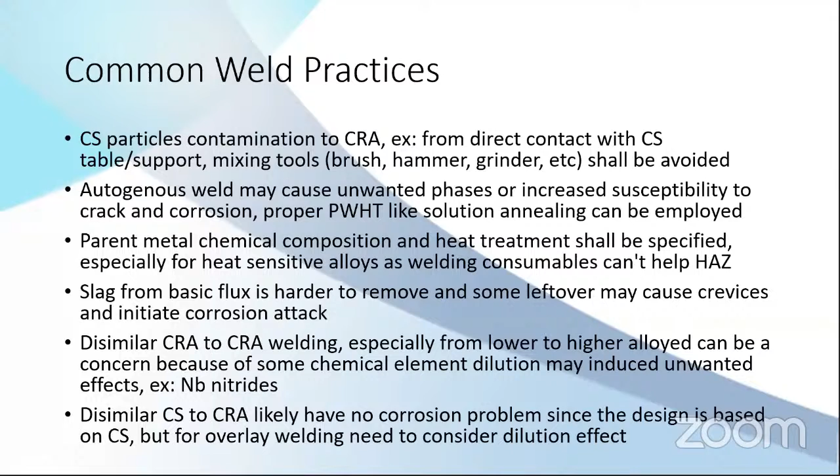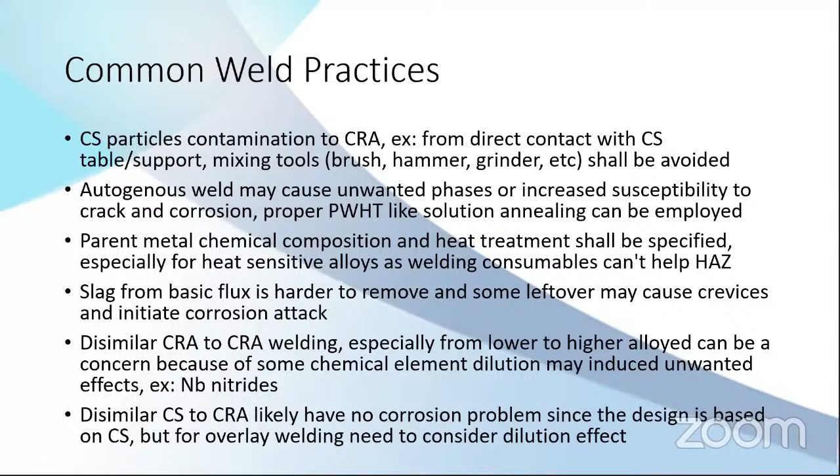It needs to be seen on a case-to-case basis. But for carbon steel to corrosion resistant material, normally there's no problem, because the design is normally based on the carbon steel. But if it's overlay welding, please consider the dilution effect, because the corrosion resistant material can have a reduction in chemical elements, so it has less resistance than before.

For repair, this is common specification for repair. If you have defects to remove, try to remove them completely with the HAZ. Provide enough access after repair so you need to inspect it again, and limit the repair if possible.

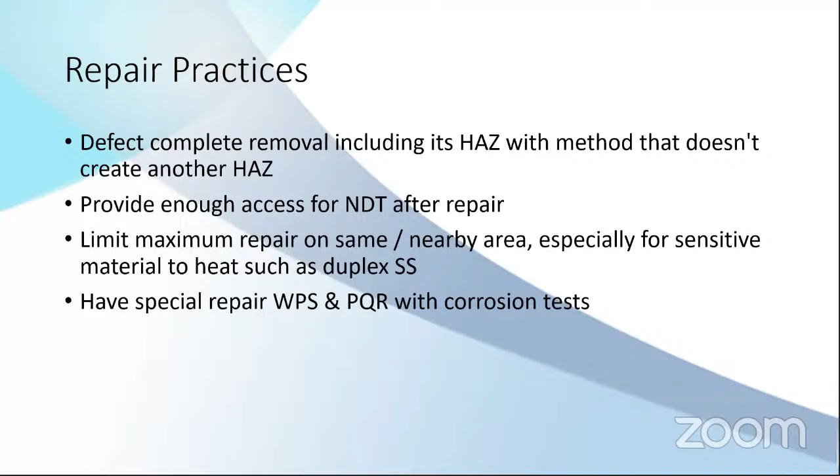If it's duplex, probably you cannot repair it - you need to cut and re-weld again, and have a special repair welding specification and PQR, including the corrosion test, just to make sure that the repair process will still have good corrosion resistance for the material.

This is the one that we don't want to have - failure analysis. When it really happens during the service, here's what normally I do during the failure analysis.

First, normally I check the PQR - does it include a corrosion test, is the parameter similar to the actual welding in the field. If it doesn't have a corrosion test, then the PQR is questionable. You need to qualify it again to see if the weld has good corrosion resistance.

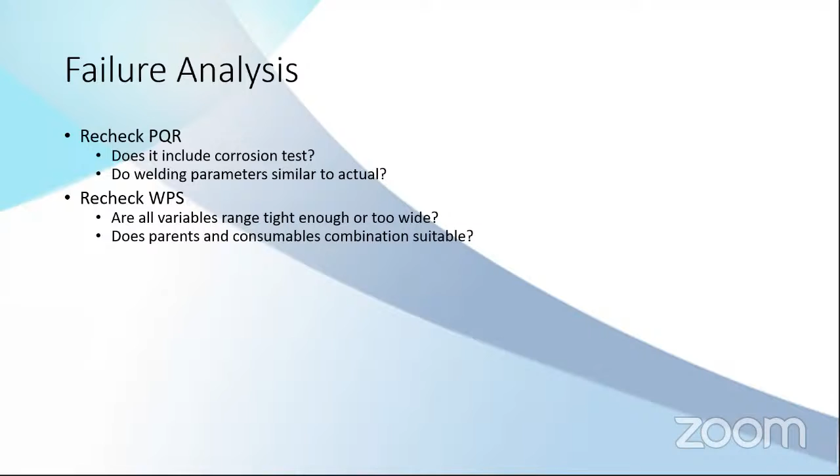Then check the specification. Sometimes the welding engineer wants to make fewer WPS, so the variables are too tight or too wide. These wide variables can have a wide effect on the corrosion resistance. Also need to check the parent material and consumables - whether the combination is good or not.

Recheck the fluid properties - this may not be related to the welding, but related to the service itself. Probably there was an upset condition, for example the chloride content suddenly getting high, or the H2S content suddenly getting high, then it may cause increased corrosion on the weld area.

Then the last one is to check the inspection record, so you need to find if there is any discontinuity that can be detrimental to corrosion. Some discontinuity can be accepted by the inspector, and it may not impact the mechanical properties, but it may impact the corrosion. And was the combination of the parent, filler, and gas selection correct?

Were the weld zones cleaned? Were they pickled? Was oxygen continuously measured? Were the welders properly qualified? These are the things that, when a failure happens, I normally check.

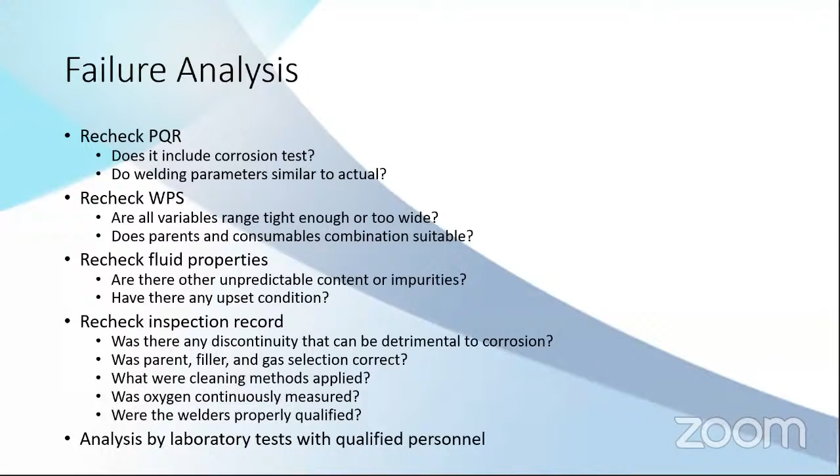When there is no answer from those checks, then you need to take samples to the laboratory to do proper failure analysis. This is one case of this.

The last part of the slide is a case study of super duplex stainless steel welding. The base material is super duplex, solution annealed at 1,100 Celsius, so the microstructure is uniform. The ferrite to austenite balance is very good, about 55%, and the ferrite number is 64.

This is the chemical composition - it's very high in nitrogen, very good, with high moly and high nickel. So this is a perfect material.

But now we are going to use a four-pass autogenous weld, TIG weld, with low heat input and high heat input. The shielding gas will be just argon.

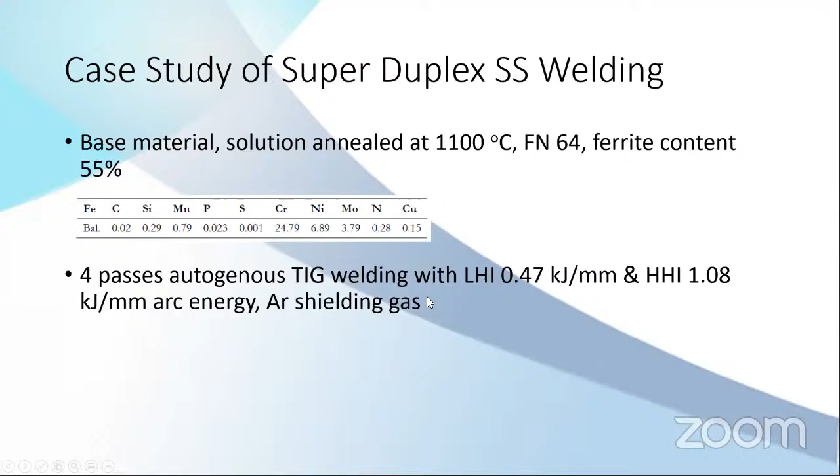If you see the microstructure, this is very balanced, very good - this is the original microstructure from the parent material. But when you see the weldment microstructure for the low heat input and high input, you can see the effect. In the high heat input, you have a lot of secondary phase precipitation.

Why? Later we can see it. So this is L - L is low heat input, 1 is 1 pass, 4 is 4 pass. You can see the effect of the heat input on the microstructure. Low heat input and only 1 pass,

you have no secondary phase precipitation, no unwanted phase. But even with low heat input, if you have a lot of welding passes, you can see some black spots. When you have high heat input but only 1 pass, you have very minimal black spots. But high input and a lot of welding passes, you have many more secondary precipitation.

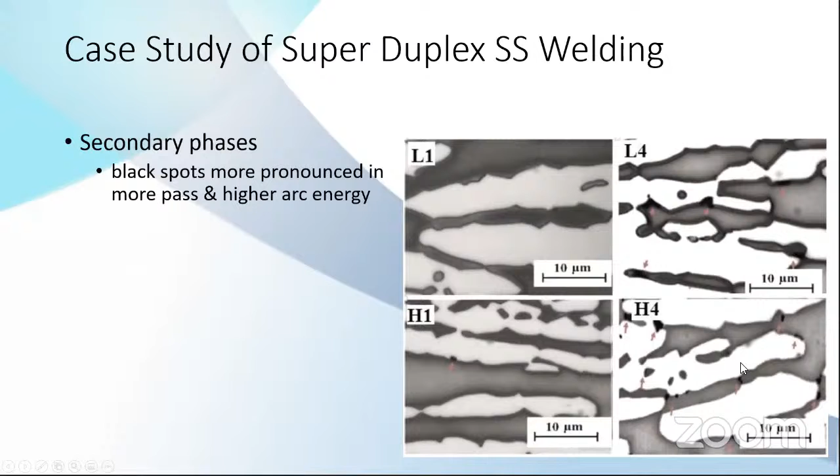So heat input is very important in sensitive material like duplex. And this is what happened in the weldment area - this is what I said before: low heat input 1 pass, low heat input 2 pass, high input 1 pass, high heat input 2 pass.

The austenite has a very low, very low austenite phase balance in the weld area. The higher the heat input, the less austenite balance. Why? Because the nitrogen is being lost - you're losing nitrogen if you're using only argon gas. The nitrogen gets out to the atmosphere, that's why the austenite phase is very low. The ferrite content is not affected by nitrogen, so it still maintains very high.

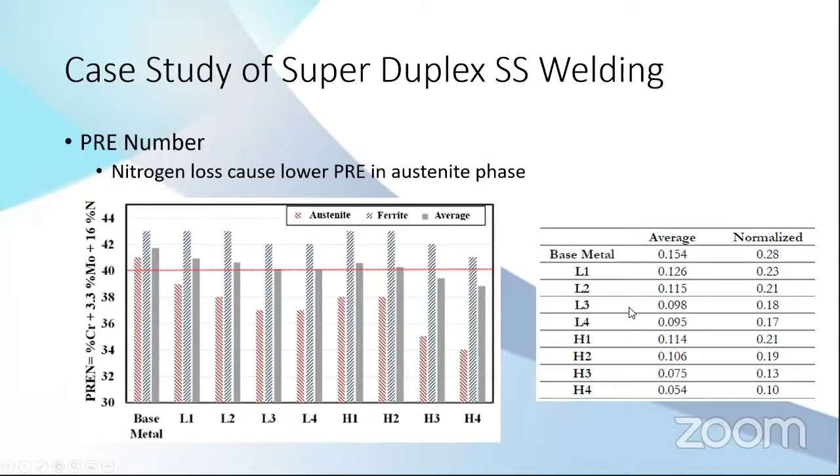In combination with nitrogen loss, you also have very fast cooling - this is autogenous weld, so very fast cooling creates a very high ferrite content in the weld zone. This is unwanted - it has very low corrosion resistance, it's very prone to cracking, and it has very low impact strength.

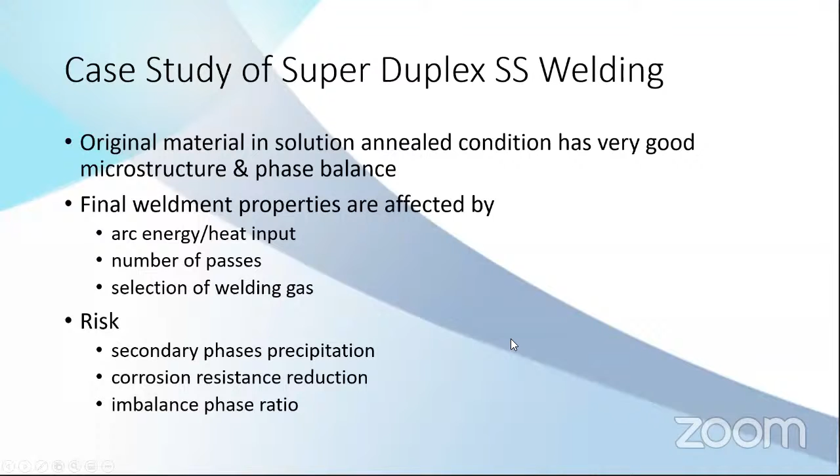So this is why weldment corrosion is important, because there are too many variables during welding. Heat input can be a variable, number of passes can be a variable, welding gas can be a variable, the parent metal composition can also be a variable. That's why corrosion testing needs to be done before welding during the PQR, to ensure that this kind of damage does not happen. What can happen? Secondary phase, corrosion resistance reduction, imbalance phase - and we don't want that.